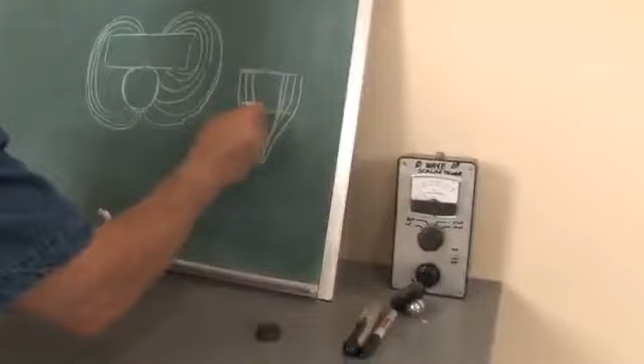In other words, what I really want to look at, and it's hard to draw, is something that sort of looks like this. So I'm trying to do something because I've distorted these lines with the iron. Sort of like the bow of a ship. Yes. And so when we come to the conclusion, what did Floyd Sweet do, right?

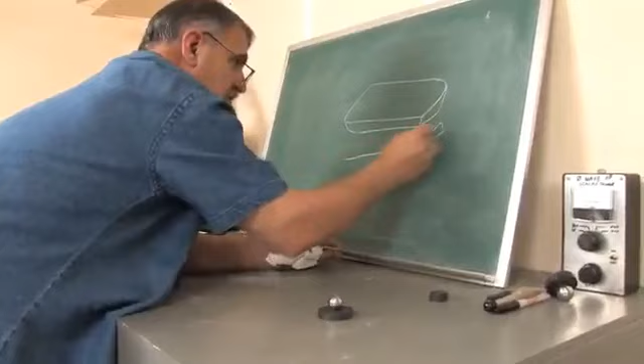So that when the oscillator came into the magnets, he was making a very, very nonlinear magnet, because Floyd said he was getting to the nucleus of the magnet, which very well may be. Yeah. But he had a cross-wound coil. Right. And by putting the signal in at the Bloch wall, down the center. Right. See?

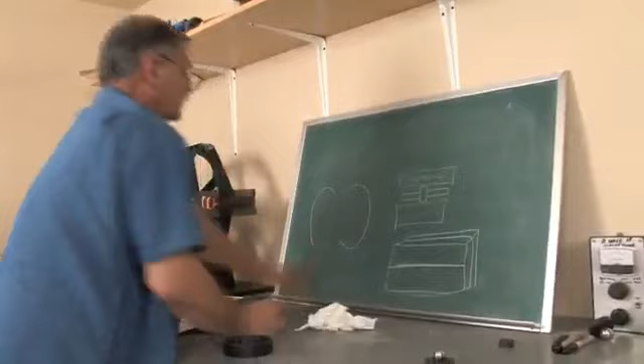Remember I said in the beginning somewhere in the film that there's this Bloch wall that's running around the magnet. But I said there were 4 quadrants. Right. So there's one that's running this way too. See? That's in between. This might be an easier way to say it. That's in between these lines that are in motion. There's a Bloch wall, or I call it a delta zero, here. There's one here. And there's one across the magnet.

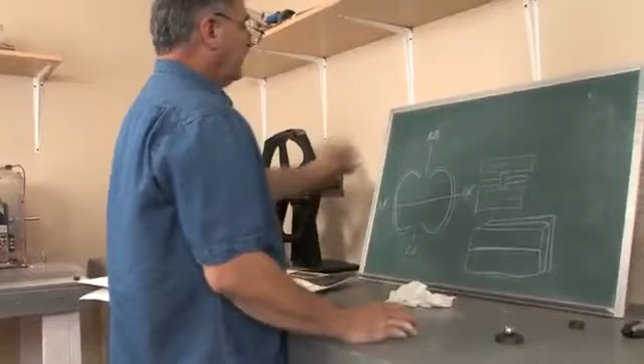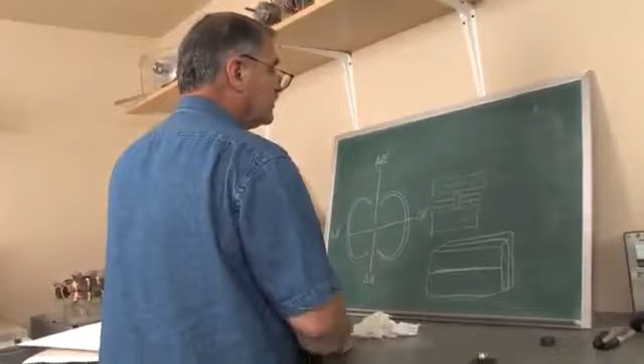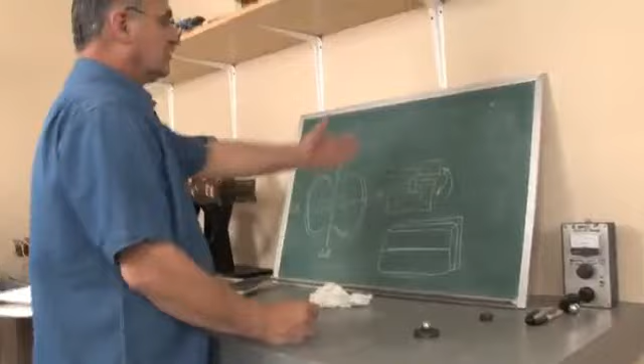So if I come in, and I'm really clever, and I figure out the exact point of this Bloch wall, I can modulate it. If I modulate it, and my magnets have been conditioned to be asymmetrical, then what's going to happen here? This was a north pole and this is a south pole. They're going to start switching back and forth. Well, what's 90 degrees from that? The power coil. Right? Well, it's going to make a dipole.

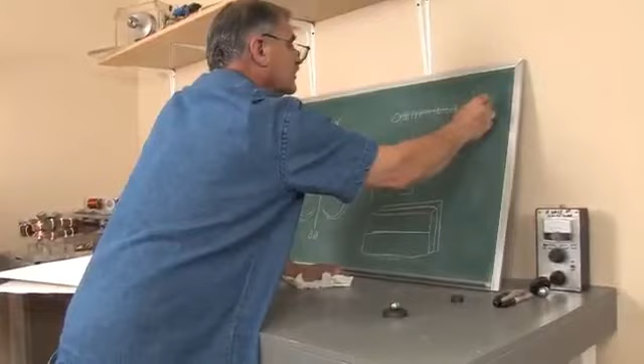One set of spins are going to go down the wire this way, emanating from it, and the other is going to go down the opposite end, and you're going to get AC. You're going to get this wave out of it. Yeah. Unless you rectify it. And so you're programming this structure the same way Howard Johnson is programming his gates. Yeah. And they're stationary.

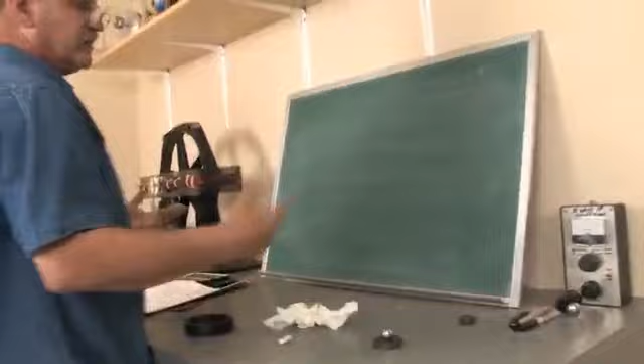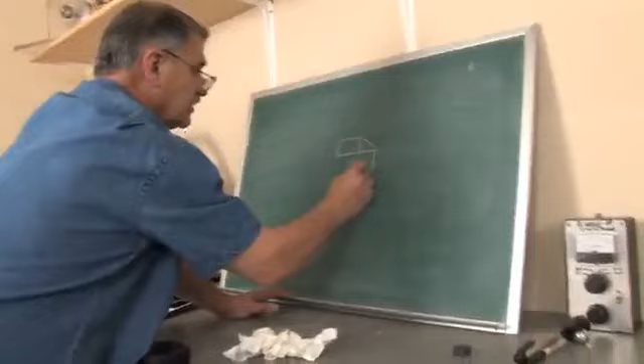I bet most people never even thought that there was any sort of similarity between what Floyd Sweet was doing. Oh, there's a lot of similarity. People just term it completely differently. And the point is to understand that if you're going to make a magnetic structure and cut the pieces with a rock saw, go this direction, and then tip this one over here, you know what's going to happen to the field.

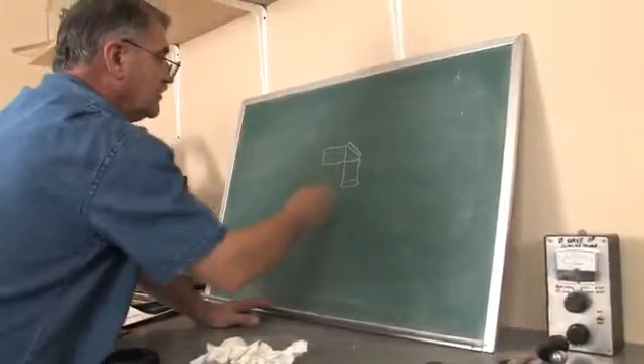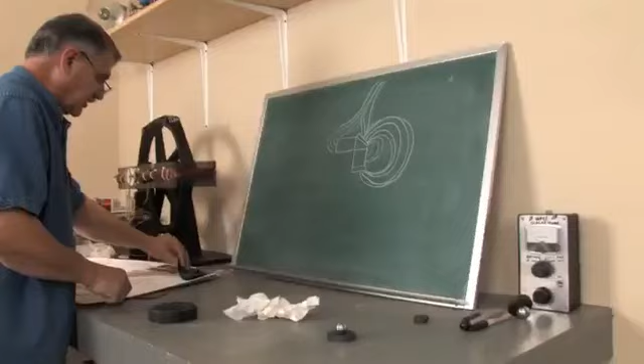When you start to measure things out, it takes thousands of data points to get the field out of this. And this may be in repulsion, you don't know, and it may want to go like this, out of here somewhere. See? And you're going to get this strange looking magnetic field, something that looks like that.

And Howard made so many of these strange magnetic structures that once again I have to go back here and show you. I'm going to leave it down here because it might be better. Well, hold it up a little bit because I can't get the... That's good. That you're going to get these type fields. I mean, look at this one.

So now let's look at Howard's train. I want everybody to notice the way these gates are made. This is Howard Johnson's original gate. Yes. Or his latest. This is the one that he was really proud of. Right, because look here, this is neo. Look at this. Look here along. So what are you actually showing? I'm showing you that it's alternating all along here. Let me come around the side then.

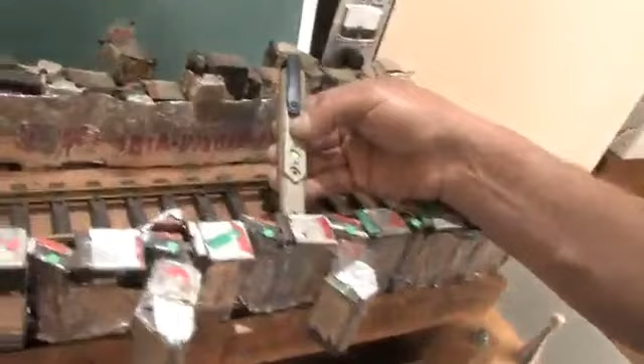And let's go on the inside. And if we go along the top, so you notice that Howard's gate on the train, he's made up these gates with alternating magnets. You can look, maybe you can get a real good close-up shot of all these gates.

And he says that this one, see, Howard puts dots. He puts dots in the direction of the fields. See them? Right. North, south, north, south, north, south, north, south. See here? And if you look down the side here, when we laboratory tested this, you can see the magnetic fields in Gauss. 13.05, 14.1, 15, see, 16.2, 17, 18, 17, 20.

It's pulling this way, right? See, and it keeps climbing. Yeah. And notice what he says here, that the car's magnet is shaped south-north. So that means that when you look at these magnets, see, he's made this curved magnet up. Look. And you know why it's alternating? Because Howard has the two particle spin theory.

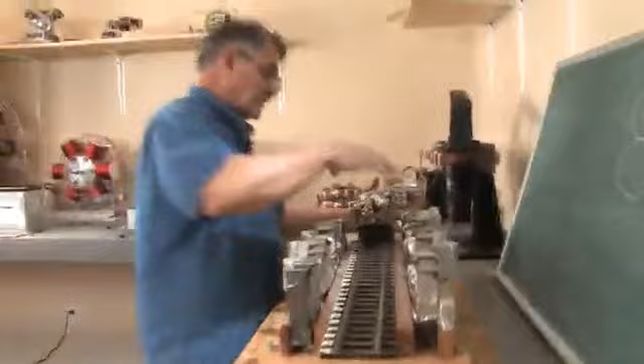Okay. And so by spinning in one direction with a hard field and then spinning the opposite direction with a soft field, he can pull this car through here. Like that, with acceleration, because it's spinning. He can pull this car through here because it's spinning. Right. See? And if we reverse the direction of the car,

Yeah, try not to hit your cameraman in the,

see, you got to orient it the right direction, right, or it's just going to come flying out of that gate, see? Right, because that's a gate right there. See it? Yeah, it's doing the switching right now, right here. See how the field's nulled out? I'm not getting a field. See, it's zero in here. There, right there, I'm getting it. See? And there it just switched. Right. See?

I can't get a shot of the, see? That's the field that's affecting it. See? Now watch. If I turn the car around, if I can get the wheels on it, it's going to go that direction, see? And it can sit in the neutral zone. See? Look, I can't force it. See? There's a null. Null. So what's happening is the gate's nulling out until it gets to the end. Watch here. See?

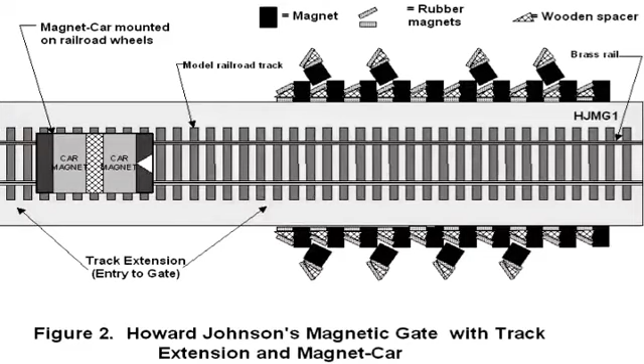And Howard's made up all these magnets. So he just made up the banana magnet that he wanted. And he's done this. If you look very closely, look, here's a piece of rubber magnet. See, look, neo, ferrite, rubber, neo, ferrite, rubber. See here? Yeah, and in actuality, in the first DVD that we did with Howard Johnson, there's a schematic of the way the magnets are laid out, which shows this. Right. So it's worth studying it.

Now here, if you'll come around this side, here's the other thing. He curved the field underneath here, see it? Right, I always wondered what that was. Well, look at this. See, it's a north end this way. Yeah. And he used to keep a piece of wood over there so you couldn't see it. Right, because that's a banana magnet underneath there. Yeah, it was kind of a secret that he had it under there. Right. Well, there are no more secrets because we're explaining to you what he did.

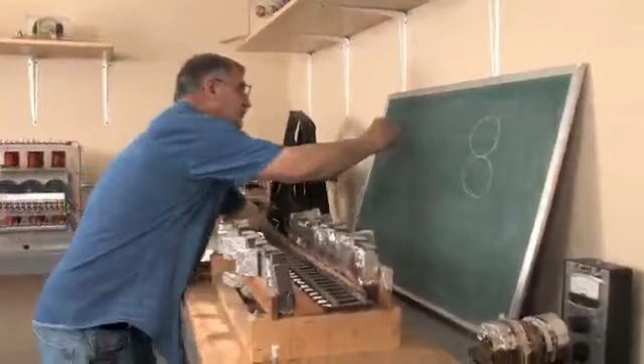Now I want everybody to understand that I'm keeping this on a very simple level because not everybody's technical. But what's actually happening here when you arrange a magnet like this, and then you just off the wall decide to put a magnet here like that, which he's cut all these different shapes, right? When you run these magnetic fields, this may be a north here, and this may be a south, and this may be a north, and this may be a south, and this may be the Bloch wall of a magnet that he's cut. You follow me? With a piece of rubber in between. And they're all glued together.

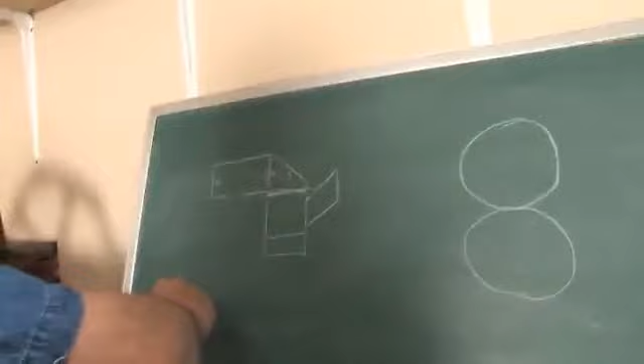So when you run a magnetic indicator or a Gauss meter over this XY plot, you're going to get a dot, and a dot, and a dot, and a dot. And these are all measurements. You're going to get dots in Gauss. And that's what you see right along here with these numbers, because we've already measured this for you. And you can see what the magnetic strength is as the car comes through the track. Let me go through it first.

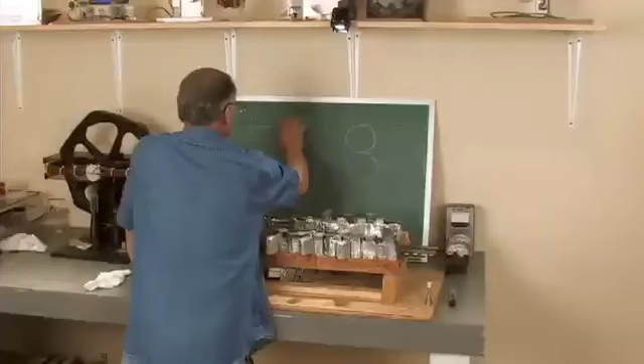Yeah, it certainly takes a lot of the mystery out of it. Yes. And so by getting these dot points, then we can go ahead, and this takes a lot of work, folks, it takes a lot of work to do this, because you got to take your time, and you're going to measure this stuff out. And you're going to have all these points out here. So when you connect the points, right? You have the computer connect the points, it's going to start generating fields. See?

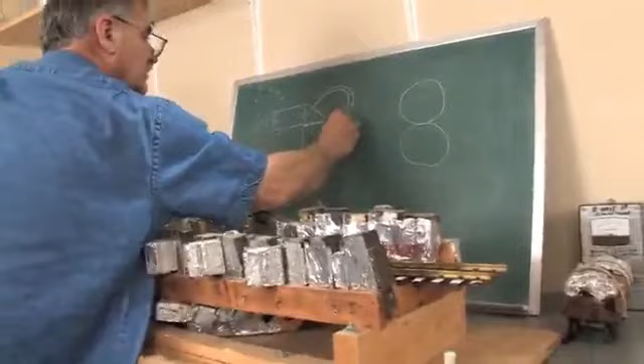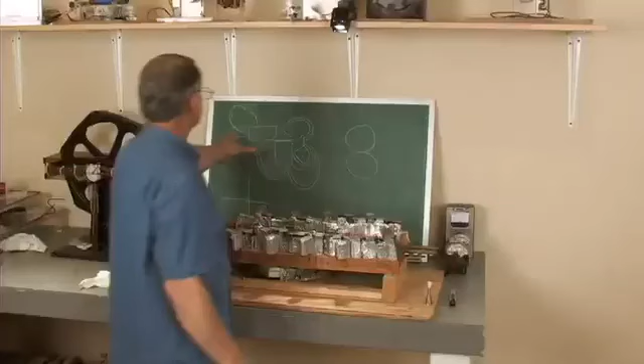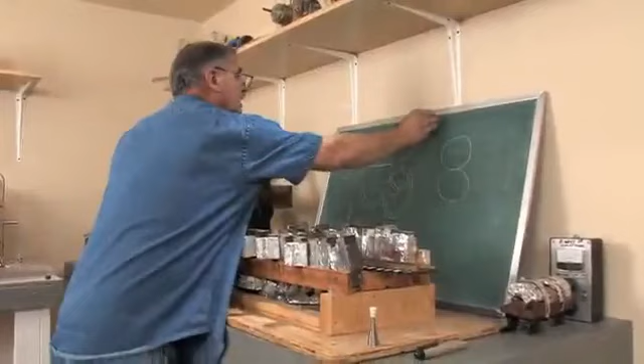It's going to start generating these fields, because there are going to be all these points in here. Right. And this takes hours and hours and hours to figure out exactly what this field looks like. And what Howard has here is a complex gate, which does one thing. It's going to change polarity when the magnet goes by it. It's going to want to switch these polarities.

And so if you look at it in real simplistic forms, it spins. It spins. It spins that direction, right? Yeah. And the other side spins the opposite direction, which drives the car through the gate. So everybody, I hope everybody learned something from what was just explained here, but here is what it leads up to.

Knowing what the gate does, it leads up to a disc. It looks as if you're looking on it straight on like that. But what you must remember is that it's depicting angles. And they're not quite even all the way around. So basically, if you're looking at this, you're looking at a snail shell. So that means then Fibonacci spiral?

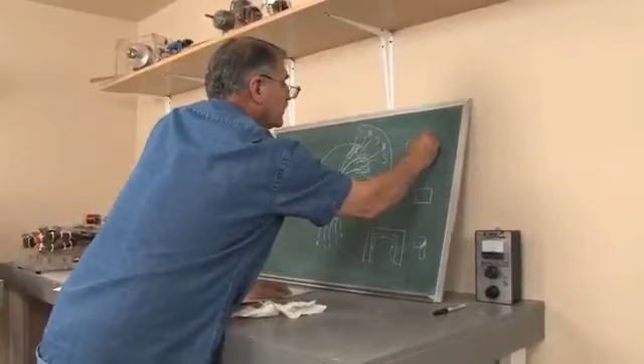So we're talking about a magnet that's maybe 1 7/8 inches long, 3/8 inches thick, by 3/4 inches wide, okay? That's all we're talking about. We're talking about a Briggs & Stratton magnet that everybody used in the SG group or any group that is familiar with my work. And this is the way it was laid out. It's laid out at a specific angle, using this spiral. You see?

I'll redraw this so they can see it one more time. See? Think of your 3 magnets like this, and your next 3 magnets like this. You gotta have good bearings on this thing. It looked like Howard had a pretty good bearing system there. Looks like Howard was gonna go for high speed. So you're basically looking at that.

I'll say this again to you. If this is a north, this is a north, this is a north. See? And you keep going around the disc. South, north. See it? And you do this all the way around the disc. All right?

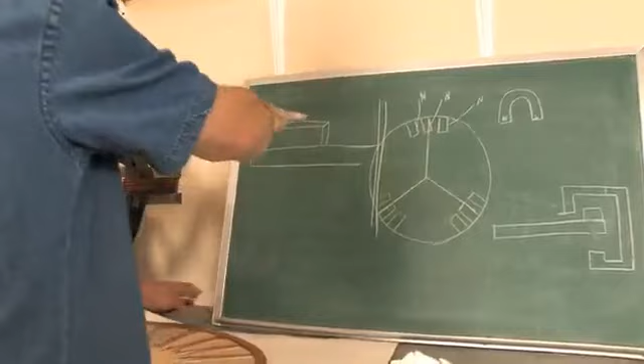This is the north-facing pole, opposite south side, north, south, north, south, all the way around, alternating, right? What is running the engine is it's crossing the Bloch wall. It's nowhere near the magnetic fields. So it's vacuum energy in a spiral form that's running. I'm going to show it to you one more time with the gate. The spiral that's going to run the engine is just like what I showed you here.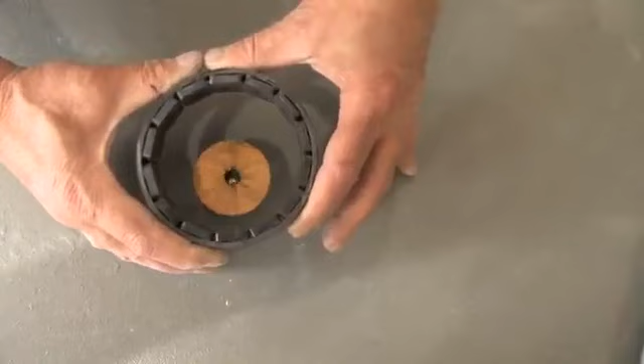Howard was brilliant in the way he laid out this wheel. You can see here that each one of these magnetic structures underneath is asymmetrical. See it? It would be over the top here, it starts to narrow here, it gets narrower and narrower, until it's almost, and then it does something completely different here, right?

And what I noticed is that the gate has to be sort of constructed like this, and these magnets have to be cut to make up Howard's magnetic structures. See, a piece of neo here, neo, magnetic rubber. And it's these angles that you have to cut, which Howard used the rock saw for. He had a diamond tip saw. Yeah, you have to have a diamond tip saw to cut the ferrite blocks. And so I'm going to draw the gate structure. And Howard has, according to his drawings, said that this has to be in a bearing.

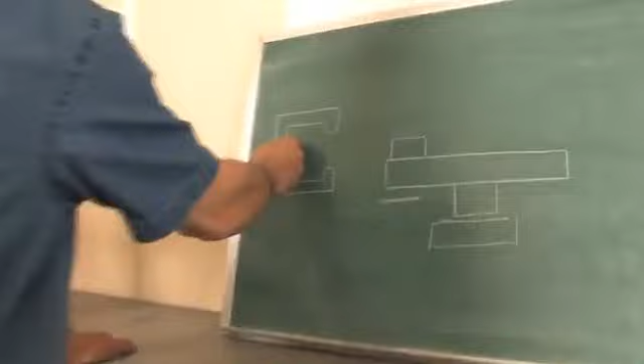Okay. Right. And the gate is the thing that's very important because it's got a slice of neo. The gate actually looks, you know, sort of like this. But this portion of the gate, right, this all becomes, say, a south, so that it attracts in this north over here.

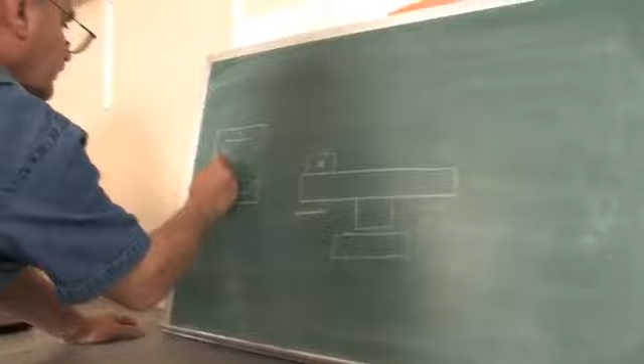And then this flips, because of the way he's got this arranged. These are actually cut pieces, cut blocks of magnetic material. So see, this portion here would be sort of the center, but in between here he's got these rubber magnets, which I've showed you on the train car. And these are all made up of pieces, and these are neo-tipped.

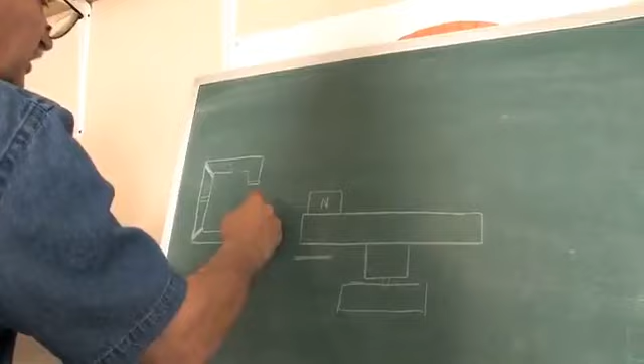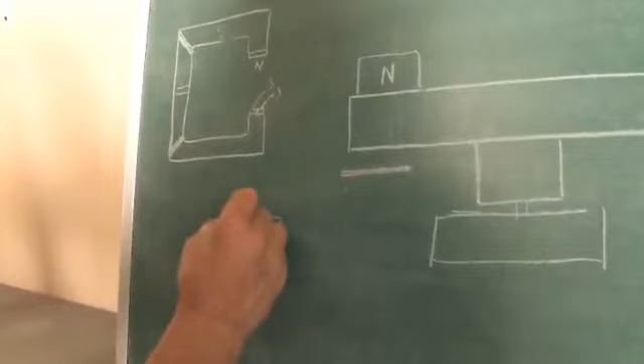And some of them are split, which means there could be 2 souths here. See, and this becomes a real strong north. So where's the split? Right here. So if you looked at this portion, the way he's tipped it is with 2 small pieces of neo. Now, let me give you an example of the gate here that we're going to work with.

And you can see it's a dual gate, see? And see how the poles are stronger here and here, and the thing moves by, and then it switches. I have 3 dual gates to work with here on this motor, because they're not all the same. You see what I'm getting at?

Right. So we look at Howard's gates. See, here's the gate face. See? South, south, south. So as the motor comes inward, as this motor's attracted, let me get this out of your way. If we're looking at the magnets on this disc that Howard's building,

if we just put one magnet here like Howard's doing, and we say this is a north and this is south, this is a stationary magnet. Nothing has been changed on this magnet, but let's say it's coming into the gate. So the gate is something like this, and this end is going down below the motor, and the gate's coming back around below, like this. See? So it's like a U, almost.

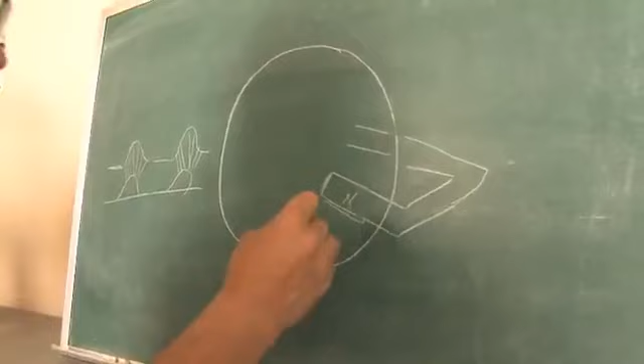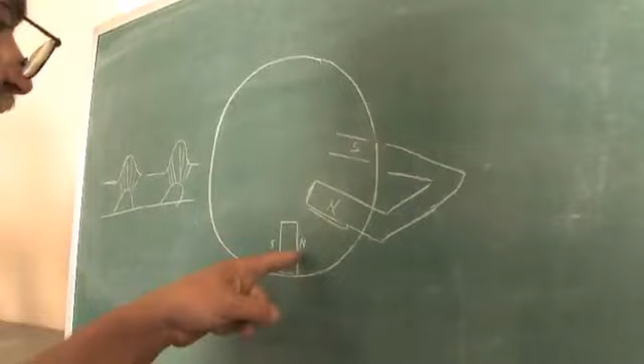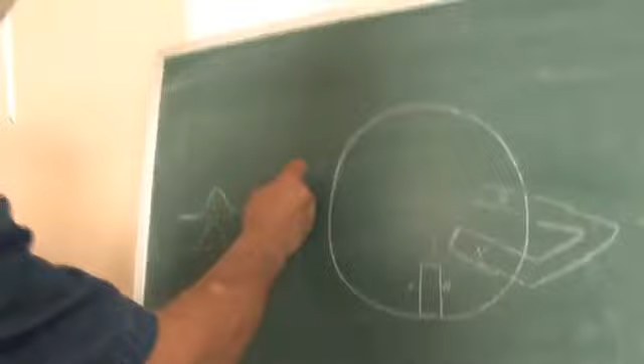So what has to happen here is, even though this is a north pole in, underneath, and this is a north underneath, actually this becomes a south with Howard's gate. But anyway, what has to happen here is this is going to repel. You follow me? So Howard's tricked the magnet into this type of field where it sucks it in, and then it's got a break point, a neutral point, and then it's got one hell of a push out. You follow me? Yeah.

So the face of this gate, and look at it this way, it's like a box, has to look to the magnet like it's south.

Notice I said it has to look to the magnet, to this magnet, like it's south, so it can pull it in. Because we don't want it to come here, get this far, and then repel and push back. See? That wouldn't do very well, right?

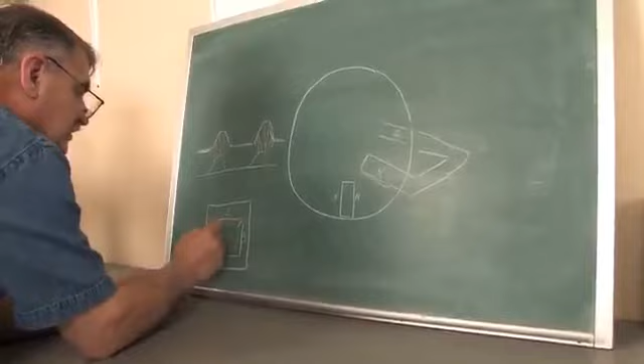So inside here, in this box, this gets very complicated because Howard is like in 3 dimensions. See? And this is north now. So it's like a north tunnel. So here's what has to happen with this little simple experiment. Remember, Howard Johnson was brilliant when it came to the 2-particle spin theory. So if we're saying this is the gate, it has to be attracted like this, which means it's being sucked upward. See?

And it has to spin, and that gate turns over, and the spin goes the other direction and pushes it out. So remember what I said, everybody thought, well, what is John doing this flux gate in the year that he did it, '84? I was studying these spins, the right hand spins on the same pole. See, there's two sets of spins on the same pole.

Because if I put an arrow here, up, right? Where's the arrow? You see, I get a spin, right? See it? Get over here where you can see it. Down, boy. Got it. See? And if I turn the gate over, it's still the same north. I get the opposite spin.

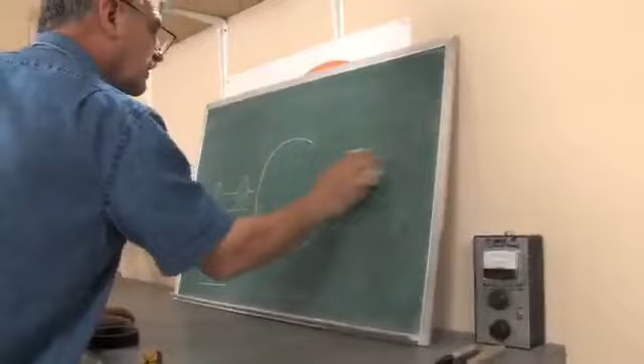Well, how can that be? You've got one north pole, right? Well, it's the gate. It's the vortex spin. It's his theory. Exactly, his two-particle spin theory on the same magnet. So you know what that means? When we look at all this, that means that Howard Johnson knew how to take this one single magnet and divide it in two.

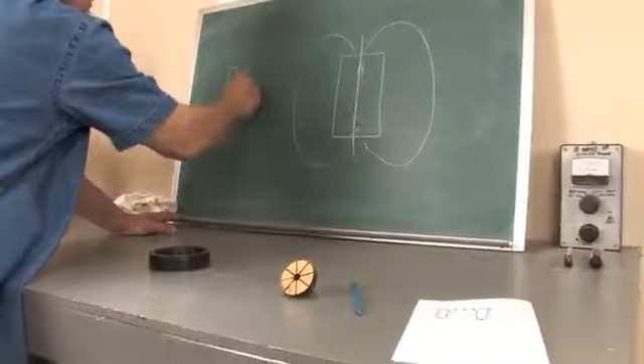So he knew that if he made this gate, the spin's going to go one direction this way and the other direction this way. But since these are all north poles facing each other around the gate, they do spin that way. One is going to spin this way and one is going to spin that way. And this proves that he knew exactly what he was doing, because I can get the spin to go that way.

And I can get the spin to go this way. And this is the same pole. So you don't see a south anywhere here. And if I turn it over, it's still north. But when I draw it like this, as a gate, with all these magnets, this is inside this gate, right?

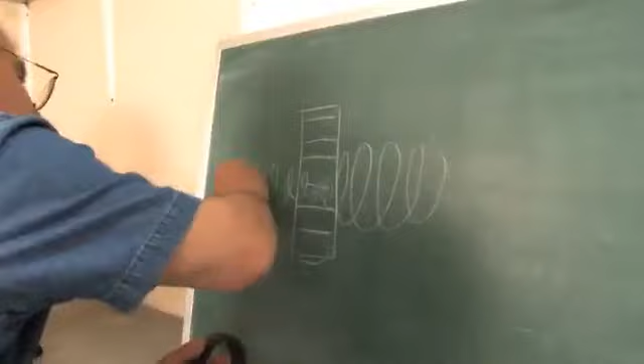On the outside of this gate is going to be all south, and on the inside is going to be all north. When it gets to the center, it starts to spin this direction, and when it gets here, it goes the other direction. Well, that's what a motor does. You come in and you have this pole that's north, and when this pole comes in on the motor and it's north, it's repelled out. But if I was to switch this, this would then be a south and it'd be attracted in, because this south is attracted by this north.

And it's still spinning. So when you build this Howard Johnson motor, which I know most people will probably attempt from this DVD, you have to understand the way Howard thought about magnetic fields, and remember that Howard's magnetic fields are strange. He's cut these magnets to interlink. So suppose this was a south, and this one's a north over here, and he put another south here and another north here, but he bonded it, you follow me?

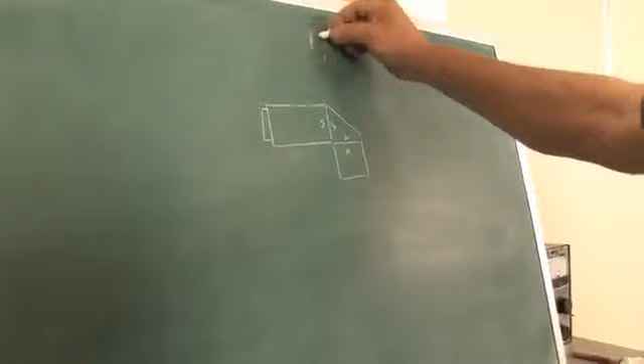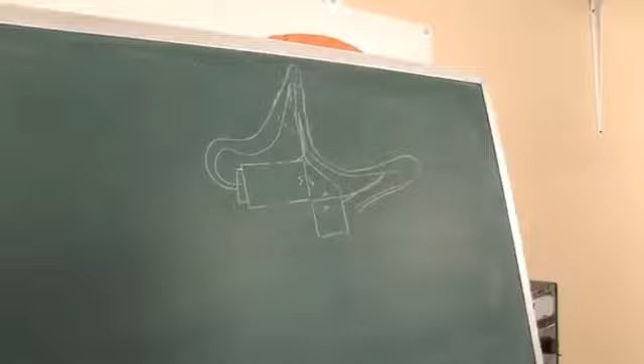And then he tipped this with a piece of neo. This field is pushing outward up here in dots. Because it wants to push outward this way, and this one wants to push outward this way. So depending on where he's placing this gate, the magnetic fields are going to look really, you know, when you plot them out, see? And it's much too complex to go into for people that don't design magnets in this documentary series.

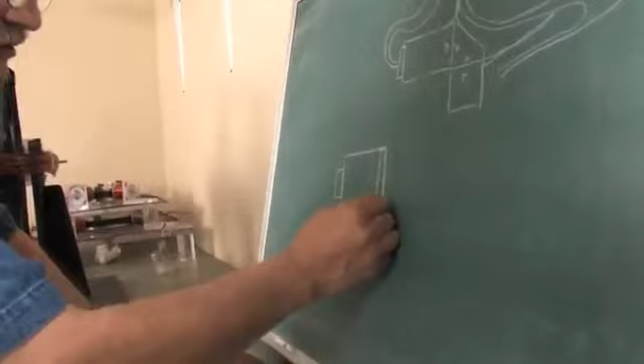Unless they're going to try to design magnets. But Howard's done something much more unique in that he's used a piece of magnetic rubber in between here. And then he's cut his block. And you can see that on the train. And then he's even cut it at a funny angle where it goes out like that.

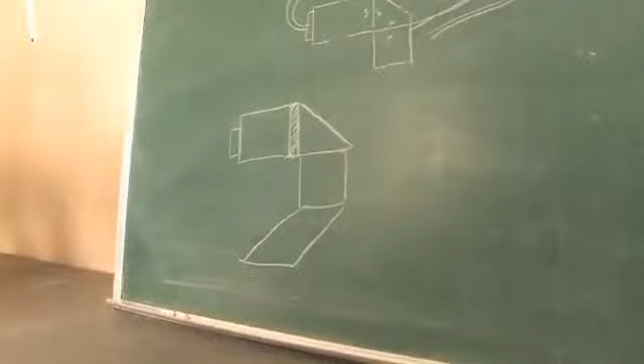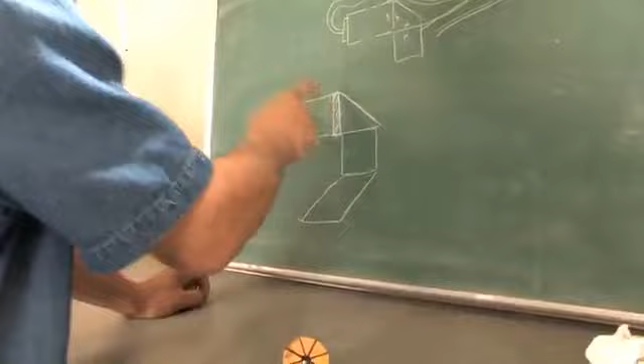Now what's the magnetic field, right? Until you plot this out, I mean, this magnetic piece of rubber does not have the strength of these two magnets. Right. So it's right where he wants it to switch. Yeah. He wants it to switch at that point. Where does he want it to switch? This is neutral in here. Right, right. It's low magnetic field on both ends.

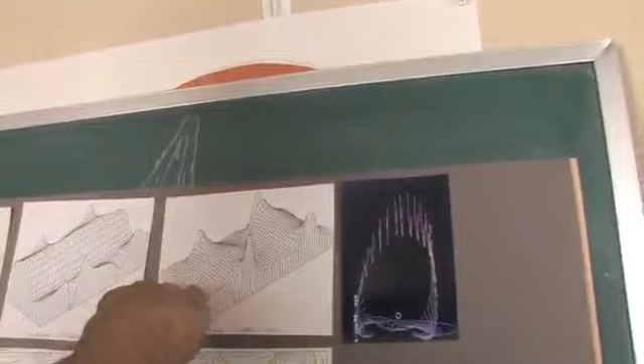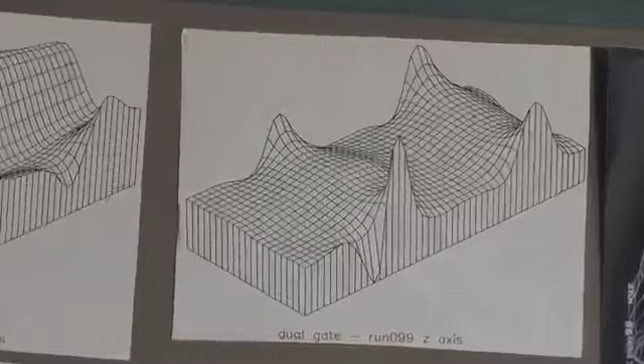Right. It all of a sudden comes into the gate at an angle, if you can look at it here. See? It's like, instead of climbing the mountain straight up, Howard's taking it at an angle. Yeah. A good indication of that, and we'll go back to this for a minute, is this is the cuts in the magnet. This is the wheel.

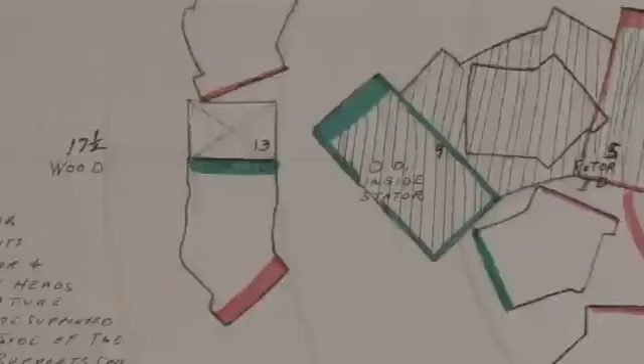That's kind of strange, isn't it? The twist motor, he called it. Yeah. So if you're looking at this magnetic structure, you notice that he's got a green here and he's got a red here, and look what he's got right here. He doesn't say. Where that X is, the cross. Yeah, he says 13, which is magnetic rubber.

Okay? See, 5 rotor, number 5 ferrite, right? So actually what we're looking at is something that's kind of like this, right? I'll get it as close as I could. And then there's this gap in between. And not quite so much of a gap on that angle, see? So when you look at this magnet, if this is the North Pole, I'm not going to draw the whole thing because you can see it right here. It's a 17.5-inch wood wheel that he's playing with.

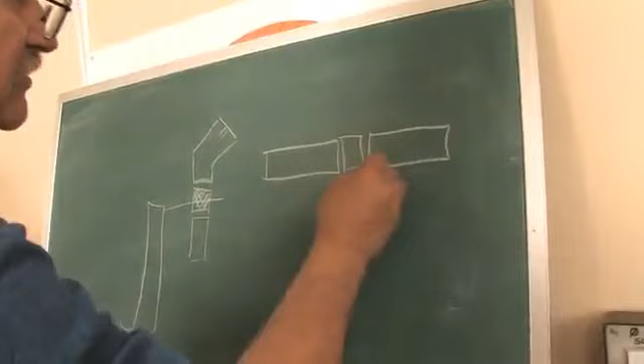So you know that this north, right? See, this south is shortened, you see? And this is magnetic rubber, something like that in between. Because when the magnet comes by, he wants the switch to occur. Right. So what he's done is brilliant. He's made magnetic switches. See? Sort of like Radus boots. Yes, exactly like Radus.

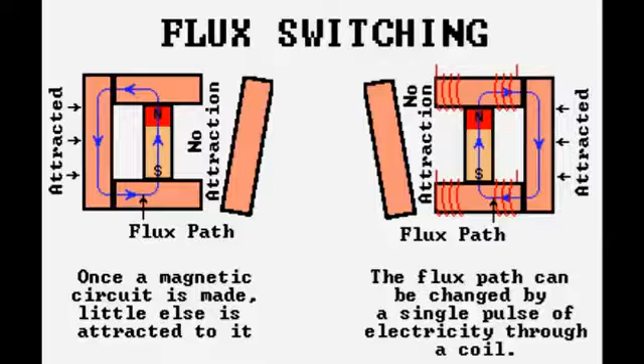He's locking in a memory in this magnet. By the way, he's cutting it and fitting it together. It's almost like nature, like you're looking at a crystal, right? And I can relate to it really well because I've built plenty of crystals in my life in the oven. And I know what the makeup of those crystals are, and some of them were magnetic crystals.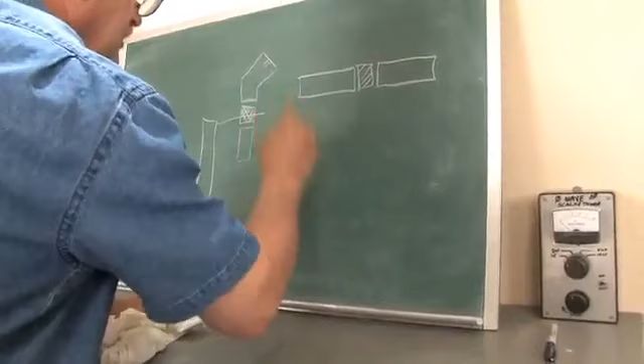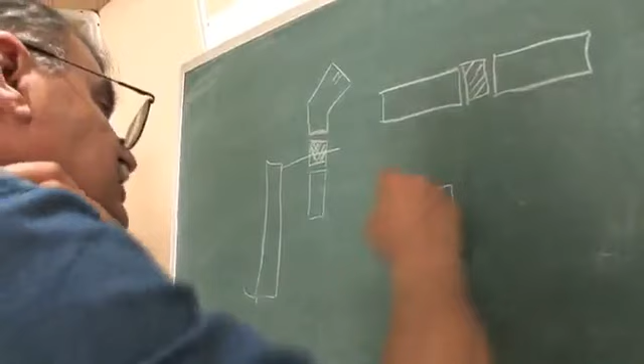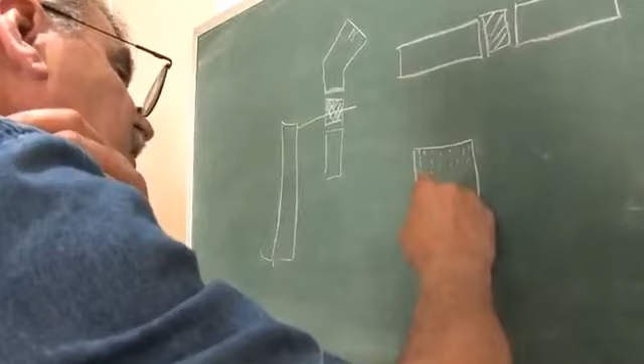But Howard can't go and buy a magnet with that sort of graining, and I'll give you an example. If you had the magnet, and you know that the grains in that magnet are tightly packed, the more you pack those grains, and when they energize and they line up, the higher the magnetic field's going to be. But suppose you only have a few on this pole, and a lot on this pole. You see what I'm saying? Then this field here is going to go like that out, and this field here is going to go like that in.

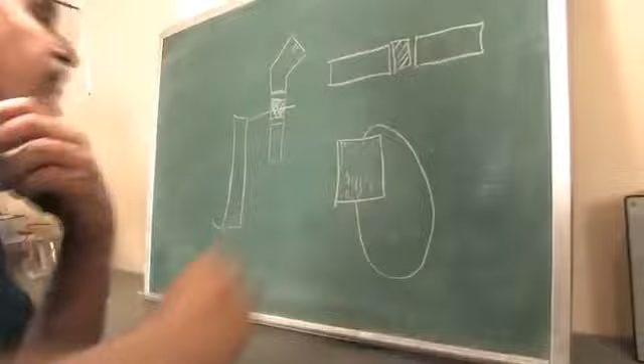And when you look at this, if this is the north, this is the south, you can see the south area is far stronger. But Howard says, let's cut this, put a piece of magnetic rubber in here, which, we don't know exactly the material yet that he used. But we're working on that. But there's plenty of that available out there. Yes, you can just get it anywhere. It's like tape rubber.

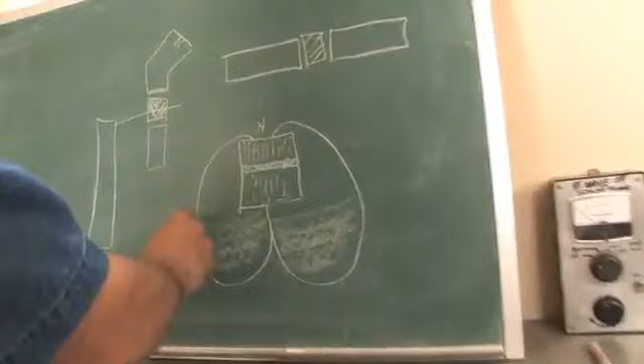So what Howard wants to have happen is, what if this conveniently stays all the same like this, but in this condition with the magnetic field out here? It's keeping it in this switched condition, right? But as this moves this way, this just moves up. It just gets weaker, and then that flips, gets stronger. See? He's making asymmetrical magnets, and you can see it right here. Let me show you one other block. See, look.

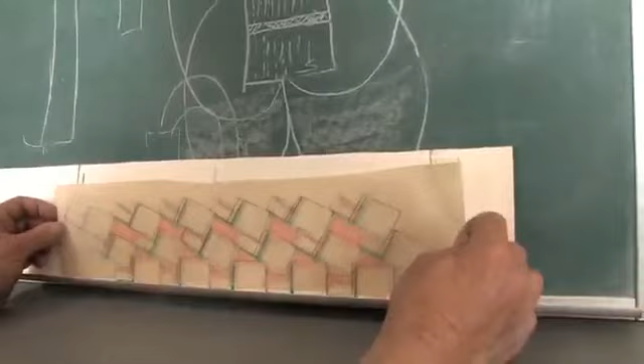He shows you the placement of the magnets, and then he shows you them put together. So there's the placement of the magnets. This is where he wanted them. And what's the tracing paper? Tracing paper is where he wanted them. He traced the exact setup for the gate that he's going to make here. Notice, he indicates by these red and green marks, and the orange ones. This is a different material. See, look here. It's cut in a shape.

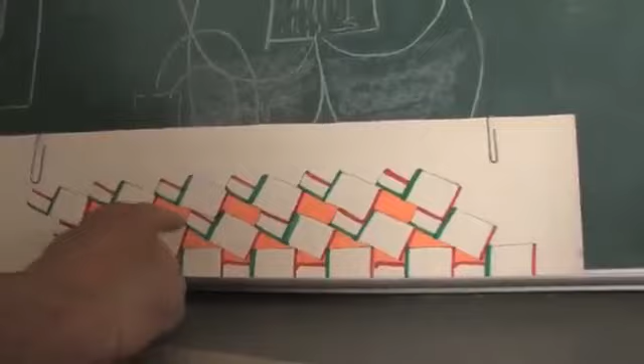And he's putting all these gates together to make one magnetic field that looks sort of like that. Ooh. Yeah. There's one strange magnetic field. And very asymmetric. Hugely asymmetric.

Yes. John, I have a question. Yeah, sure.

Thinking about this and looking at the gate down there and all of these magnets, all these angles, how could he replicate, or anybody replicate that for a commercial thing? I mean, every time you try to replicate it's really different. Well, you can't, right? Not one person's going to build one machine the same.

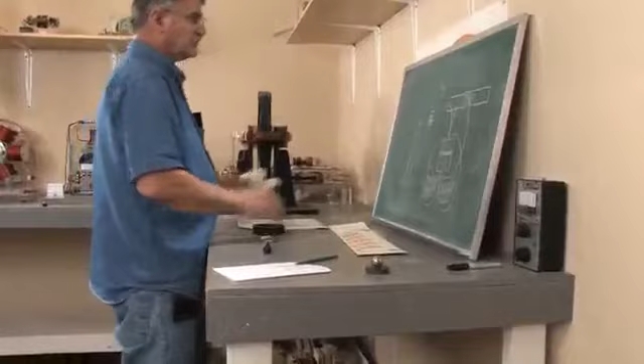Okay. But what you can do is, by making the magnetic material, let's just take the banana, right? By taking this banana magnet and changing the material in here somewhere. In other words, changing the mix of the material. You're gonna have to mold this magnet so that it contains these materials in certain areas in this banana magnet. That's exactly what Howard was doing.

Tony, that's why he wanted to take the rock saw. Right. He said he had to take his rock saw and start cutting all this, right? Because he couldn't have made this motor without doing that. Because he couldn't buy the magnet that had different materials in each area. You follow me? Yeah. There wasn't anybody that was going to make this. So by building a mosaic, he could tailor it.

Yes, he learned that a long time ago, with his theory, right? Because he said Feynman was the closest to understanding all this. But Tom Bearden one time sent me a book that said there's so many differences in magnetic fields and so many magnetic things, right? And each material is so different. Right. I don't think Howard was ever able to get the amount of money that he needed to go to a laboratory where they could mix the material for the magnet that he needed.

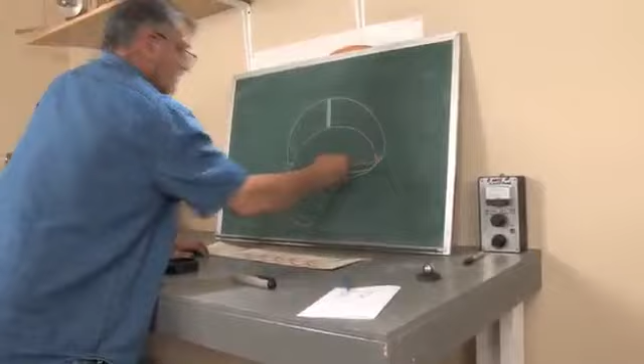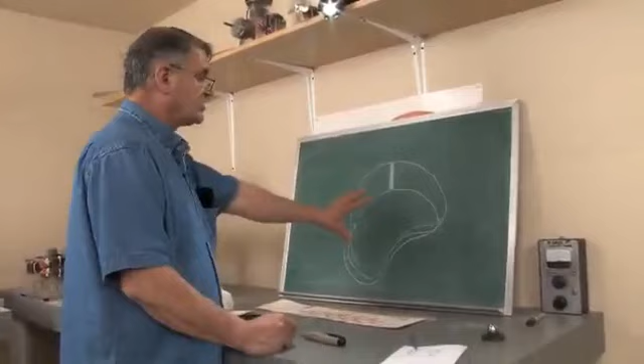And so he's made an asymmetrical magnet. Right. Or we're in the nonlinear range. It's nonlinear. It's not a linear magnet. Because he wants it to do something. And he knew in advance exactly what he wanted that magnet to do. He wasn't just stumbling into something. Oh, no. He had a plan and he was executing the plan.

I don't think people out there really understand just what Howard Johnson was all about. If you study his work, you know the man never talked. He was very secretive. I'd call him up on the phone and say, "It's John," and he'd go, "Oh, hi. How you doing, John?" And I'd say, "Howard, have you ever heard of blah, blah, blah?" And about a minute would go by before Howard would answer. We had quite a few conversations. It took me a long time to get through to Howard, and Howard to get through to me.

But I don't think people understood that he was never going to tell you anything about how he was doing this. You weren't going to see it. If he was working with anybody, the person would be untrainable. Well, Howard's background was in cryptography, and very secretive. You have to remember that after World War II, he was offered the job of head of cryptography for the Navy, and he turned it down. You have to be a very secretive man your entire life. And Howard Johnson never gave away his secrets.

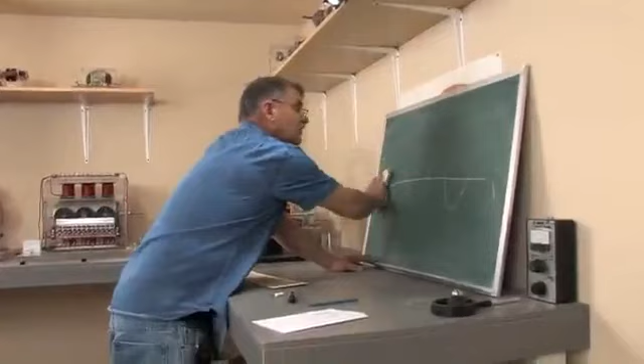There's experiments that I've done in my life where I can tell you if you take a disc like this and say this is the magnet, and you take this magnet apart and you break this into all poles like this, if I put in here a shaft, and I bring a rod out and I face a pole magnet this way, if I break a certain spot here, everybody knows if you start here with the magnet, it's going to go seek the neutral. It's going to seek the delta zero. I call it delta zero.

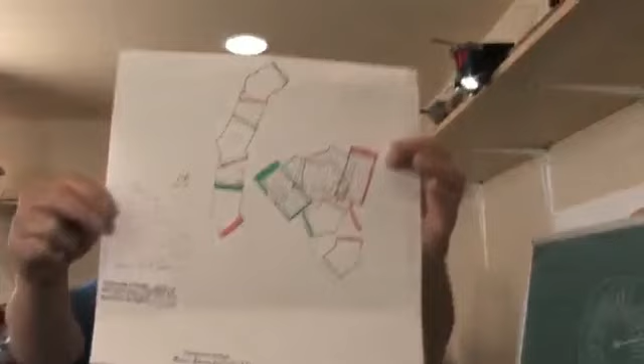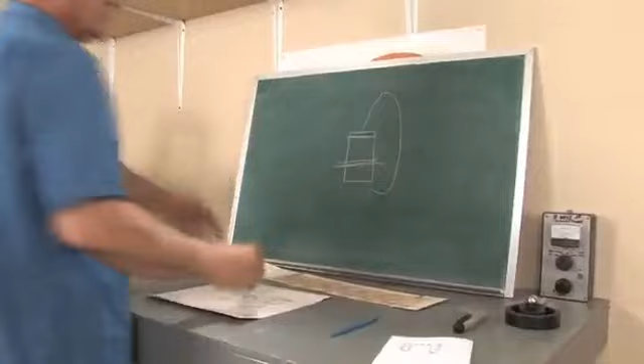He gave you the folder because he wanted somebody to keep up his work. There's a very simple method that an experimenter can do to find out. He can take a magnet and he can add a needle end to one magnet. That's going to shift the Bloch wall so that this field's going to be big and this one's going to be a small field. Yes, they can find out.

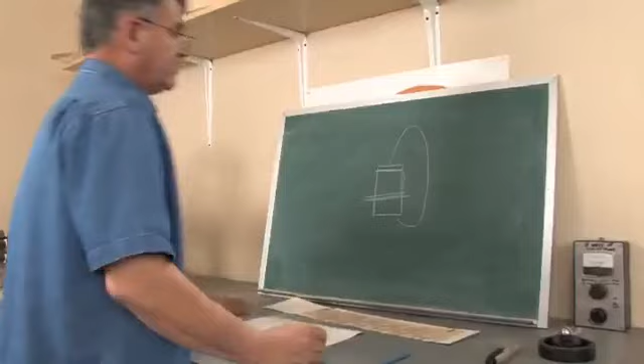That's right. Howard Johnson helped me when I had nothing. A $500 check came out of nowhere. And in the end, as you know, when the SG started to go, Tony, and the book started to work, I wrote Howard Johnson a check and sent it to him. So I just want everybody to know that Howard Johnson might have been a very quiet man, but he was a very brilliant man.

Yeah. And I was glad to help you out with this. Well, thanks very much, John. Appreciate it.